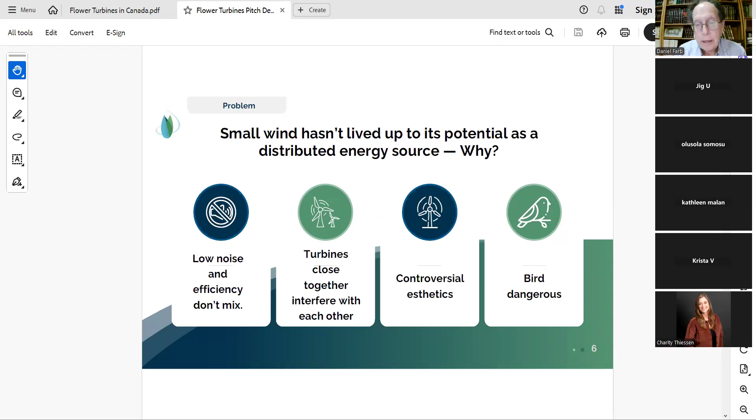So let's talk about small wind energy. You don't see so much of it, and that's because it hasn't lived up to its potential, because it hasn't solved, at least with other companies, several basic problems. One is to make low noise and efficiency go together. Usually turbines, when they're close together, interfere with each other aerodynamically. The aesthetics are controversial and they're dangerous to birds. So we have solved all these problems and more.

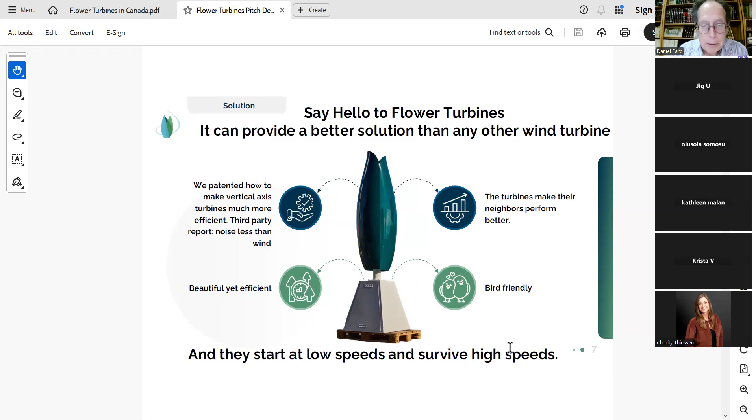One of the key ones is that the turbines make their neighbors perform better. We'll speak about that a little bit, but the birds love them and they start at low speeds and survive high speeds. What we've done in the last few years is we've assembled a product line, different sizes of turbines, and a different type.

We also offer aluminum with much of the same aerodynamics, and we've branched into e-bike charging, which is very popular in Europe, and also special systems for installing on rooftops using balance, friction, and weight to avoid drilling into a roof.

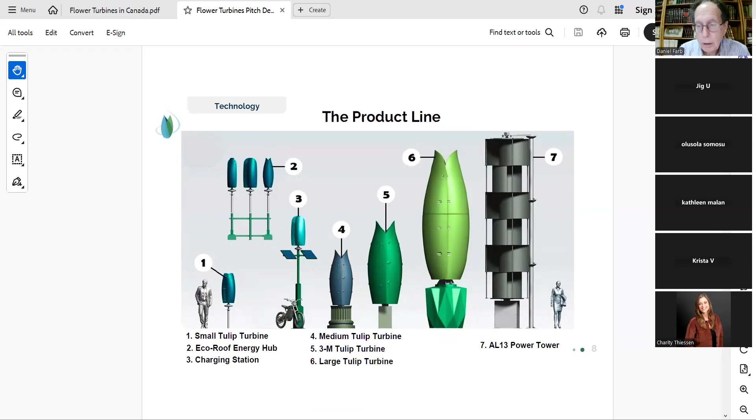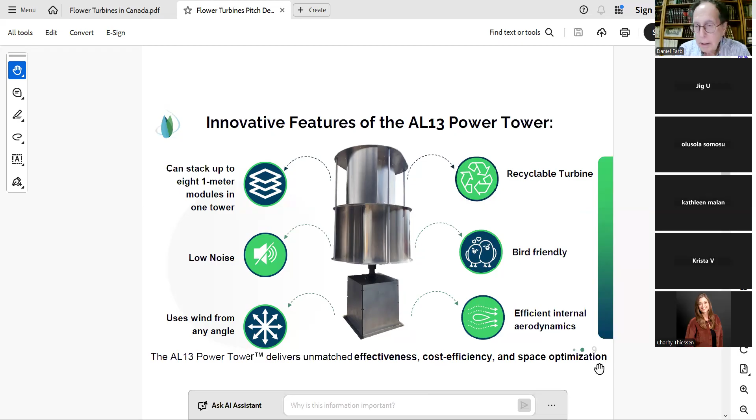So our AL13, the aluminum version, has a number of innovative features. It's modular. We can stack these on top of each other. It also has low noise. It's better than our tulips for getting wind from any angle. It's recyclable, made from recyclable aluminum. And of course, it's bird friendly and cost effective.

And it's cheaper in all markets because it uses aluminum. By the way, that's important for Canada, which is a big producer of aluminum, that we should be able to make these at a lower price there.

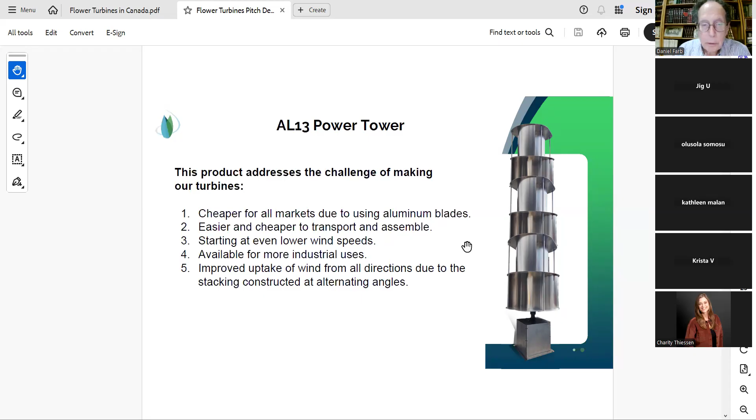Also, a new addition to our product line is we've started to produce some of the electronics. We're starting off with our own brand of low power consumption charge controllers. A charge controller connects the generator to either a battery or an inverter.

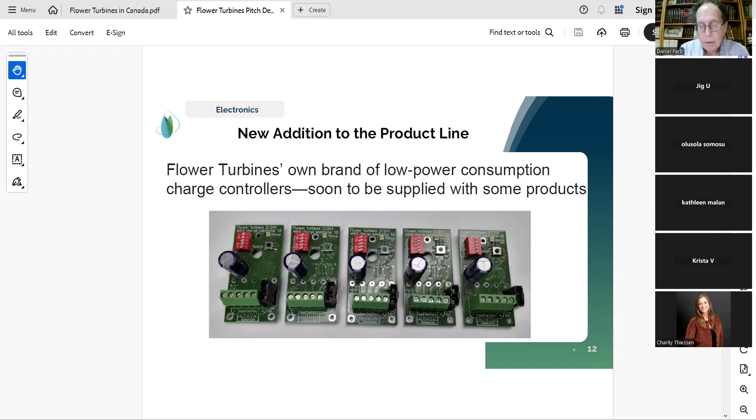So these operate with almost zero background consumption, whereas the competition from China either lacks a lot of the features or has a higher background consumption. This is a nice step forward, and it's going to be the foundation for some very sophisticated patents that we have in electronics.

So far we've been doing sales and manufacturing in both the US and the EU. And one of our next target markets for manufacturing and sales is Canada.

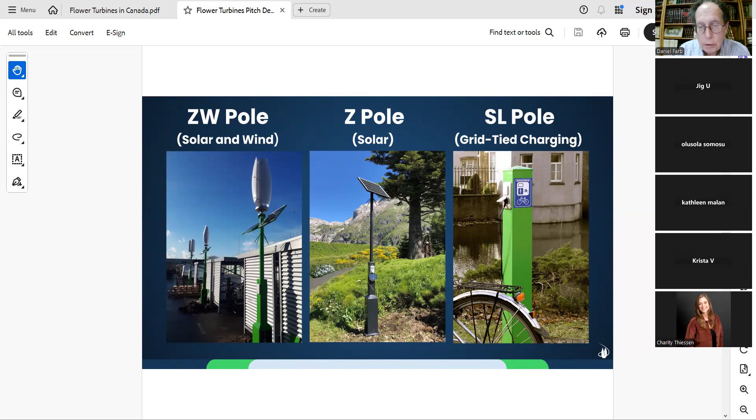This is a solar only pole, and we also can connect to the grid and have this available as part of the suite that we offer for encouraging the industry of e-biking, scooters, etc. So I'm going to show you a little bit of the technology.

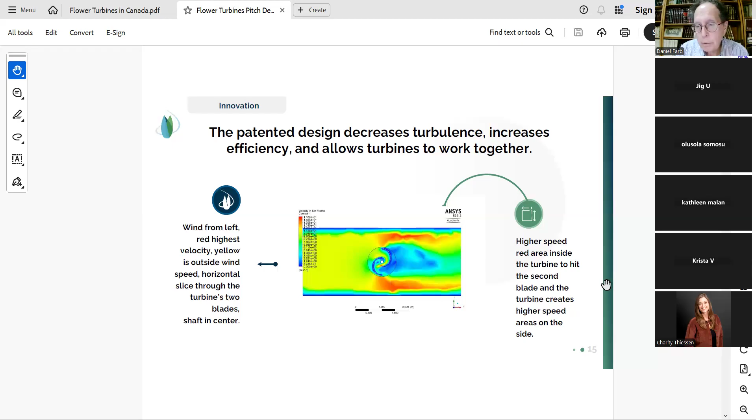Now, something that is a major area of importance is you see that there's red on either side. That's the basis for our cluster or bouquet effect, whereby we can put turbines close together next to each other, and they drive wind currents into each other, so they become much more efficient. This is one of the major things that we believe is going to make us a global company.

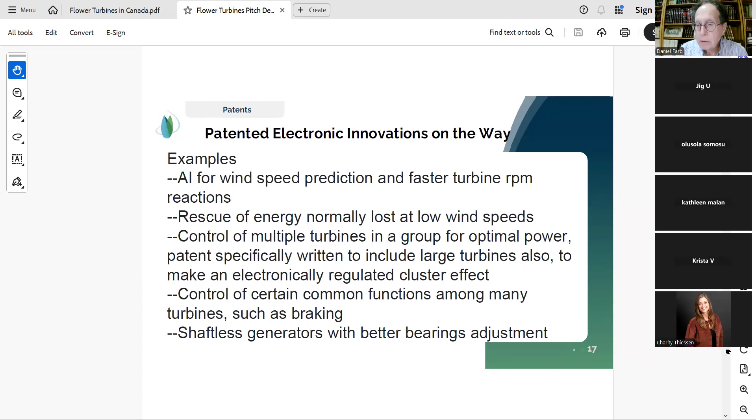So all of this and much more is, of course, patented, and we have many areas of patents. We have aerodynamics, which came first, then patents in installation and manufacturing, and our latest area of major patents is electronics - also a game changer, just like our aerodynamics was. We also have design patents and copyrights. We have a first-class portfolio of over 30 patents, and coming soon in electronic innovations is use of AI in wind speed prediction and faster turbine reaction, rescuing energy that's normally lost at low wind speeds, among other things that are really going to be game changers.

So we have patents as a portfolio approach that make it possible for us to block imitators at many different levels. For example, they're trying to come close to our basic blade design in China, but they can't because we have patents on it. And they're only putting them as single installations because they know we also have a granted patent in China on the cluster effect. So this is something that protects your investment, and having strong patents are one of the best ways to protect your investment.

So let's see how it works in practice. This is a power curve of our largest model - it's a little faint, but this is 3 meters per second, this is 1 meter per second. Most turbines only start functioning at 3 meters per second. You see we're already producing a fair amount of electricity at that, and we're actually producing small amounts below 1 meter per second. That's very important - that's one of our major advantages.

Now here are measurements on the cluster effect. You can see this is one turbine, two turbines, three, four. You see that at 4 turbines clustered properly, we're already producing double the amount of power of one individually. That means that 4 clustered turbines from us are like 8 separate ones put in different locations. That's very powerful, and you see the curve continues nicely through 5 and presumably much higher.

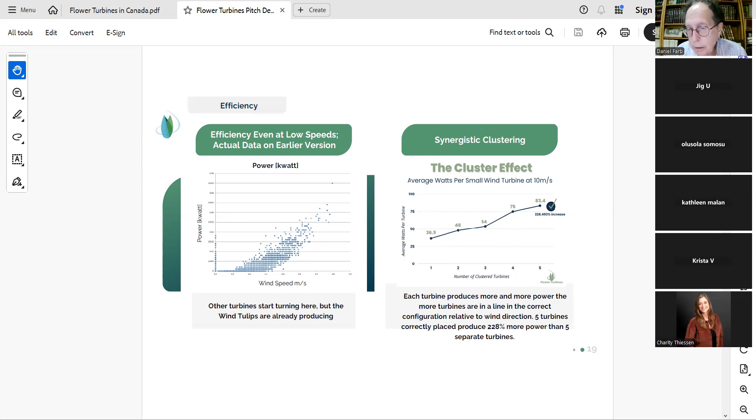So this is our major game changer, and by utilizing this cluster effect, it enables us to provide unique services to hopefully 11 million large buildings in North America, which will give us a market just in large buildings of $850 billion.

So we actually think we can do better than that, but that's the potential market of large buildings in windy areas throughout North America. And if you go to northern latitudes, you'll see how we compare to solar - the cost effectiveness and return on investment is approximately the same. Maybe in a windy area we're a little bit better. But what's really higher, much, much higher, is the amount of energy produced per square meter of either ground space or roof space.

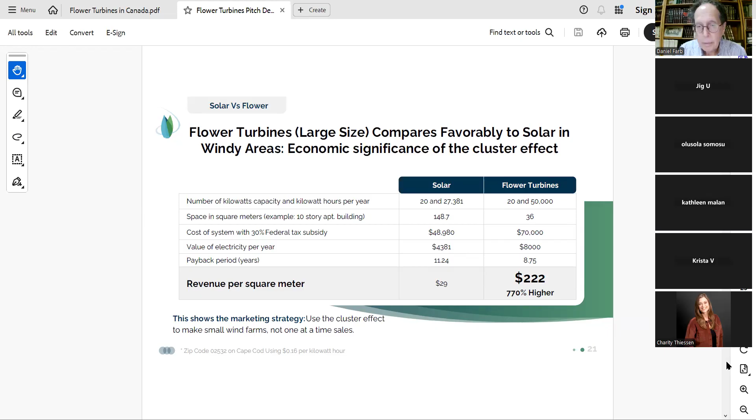So our main thing is to sell, and we have a margin, which is nice. We can also sell the electricity in projects, and that's one of the things we want to move into now. We can also get advertising money from it, and there are aspects of our electronics patents that I believe we can license to large wind turbine companies. So we have a lot of ways to make money.

We've been very popular - we've already raised over $17 million. And our current raise is both worldwide, based in the United States, and separate fundraising in Canada.

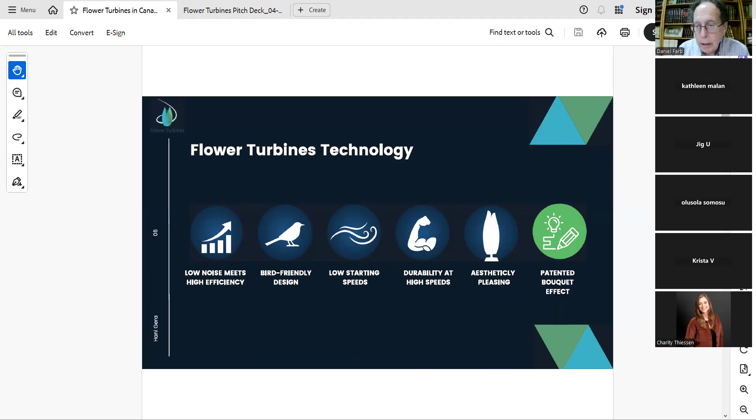So we talked about our technology. I think these are all things that matter in the Canadian market. The Minister of Energy said that clean energy innovation projects will be a key driver of decarbonization and jobs in Canada. Here are some examples of support — multi-billion dollars available as loan guarantee programs and other types of programs.

The problem in indigenous remote communities, as I mentioned, is the diesel. The diesel cost is usually around 40 to 50 cents per kilowatt hour — it's hard not to be able to make that better. So we provide a clean, cost-effective alternative, and there are around 300 communities like this with 200,000 people where what we do could really make a difference.

If we were to take just two of our power towers with 6 meters per second wind, which you find in this area, it would produce nearly 20,000 kilowatt hours annually with an investment of 38,000, meaning an ROI of 25% per year, or 4 years return on investment. And of course, it would get better with a bigger cluster.

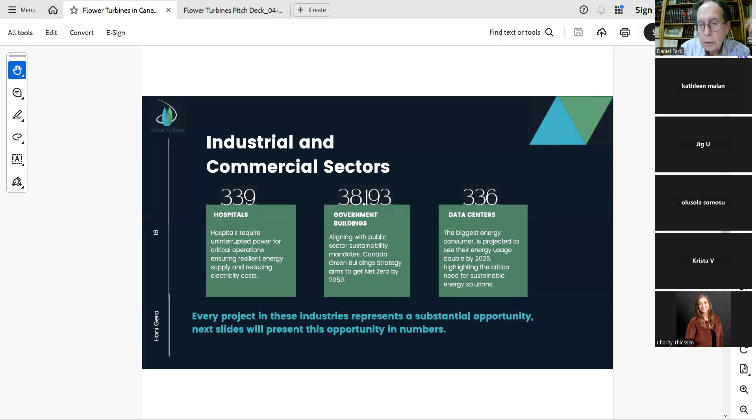Data centers are basically chewers of energy, and there is a lot of controversy about how they're taking electricity away from people in homes and businesses to feed the growth of data centers. What we offer is one possible solution for the data centers — that's one of our target industries.

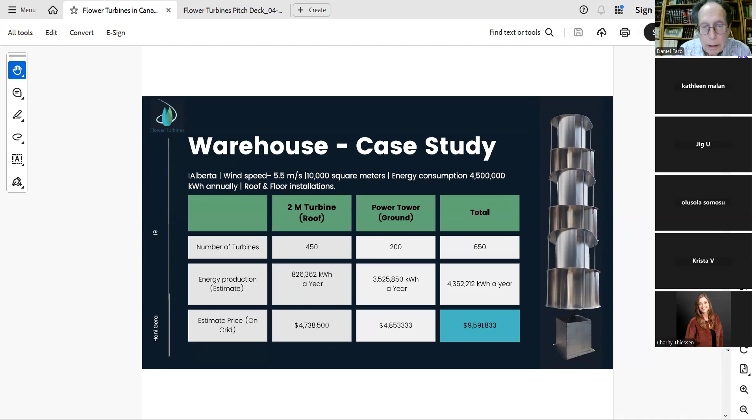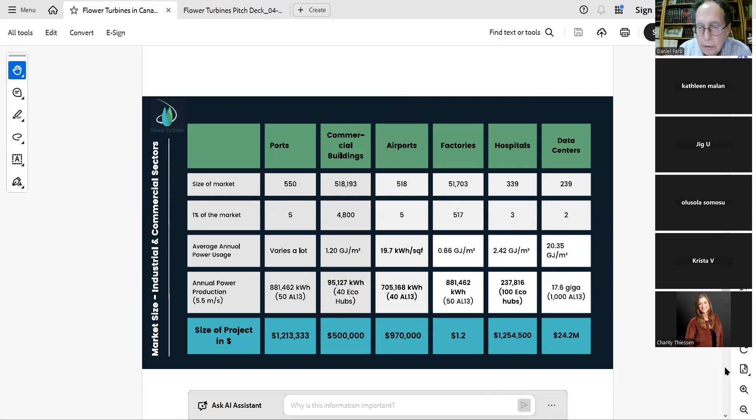Here's a case study of how we could make a large warehouse perform cost effectively on wind. I'm just going to go through it quickly.

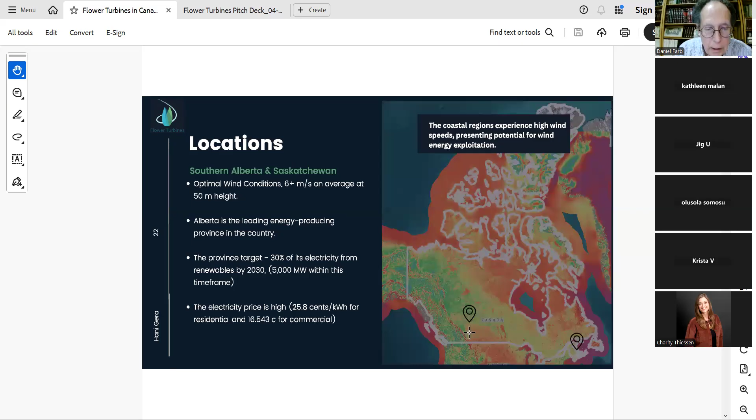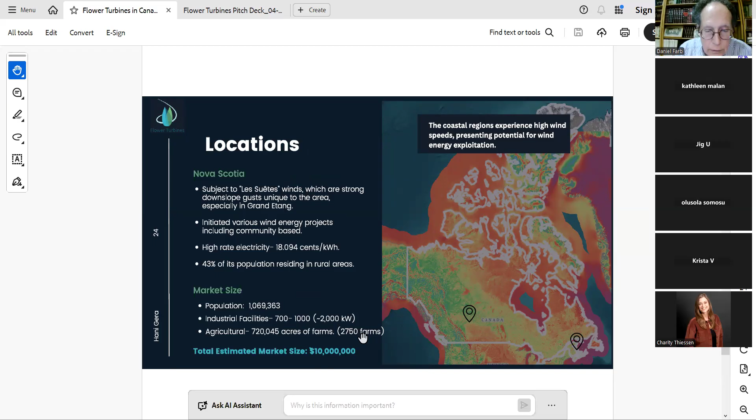Nova Scotia, fantastic area for wind, and there's industrial facilities around, 1,000 and agricultural facilities. All of these are remote areas that would do very well with energy.

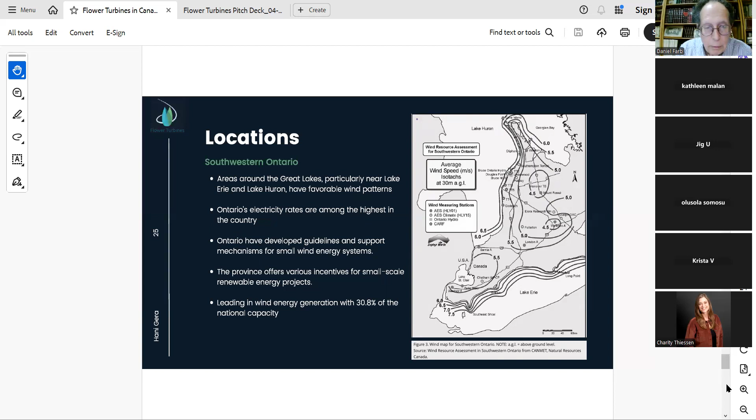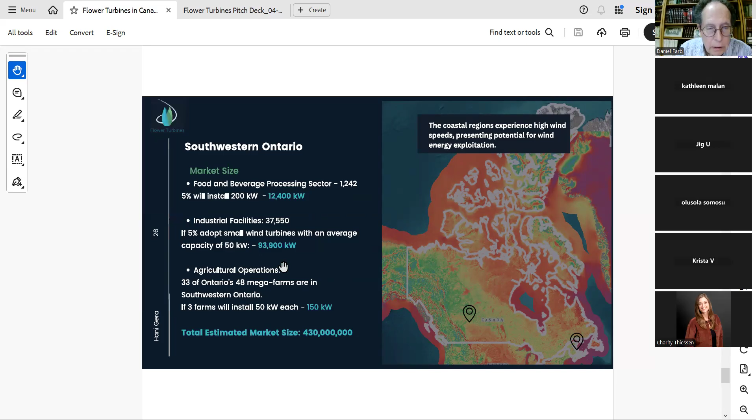And of course southwestern Ontario, it's near the Great Lakes, and Ontario's electricity rates are among the highest in the country, so we can definitely help there. Southwestern Ontario has a very big food and beverage processing sector, a lot of industrial facilities and agricultural operations, all of which help provide a very large market size.